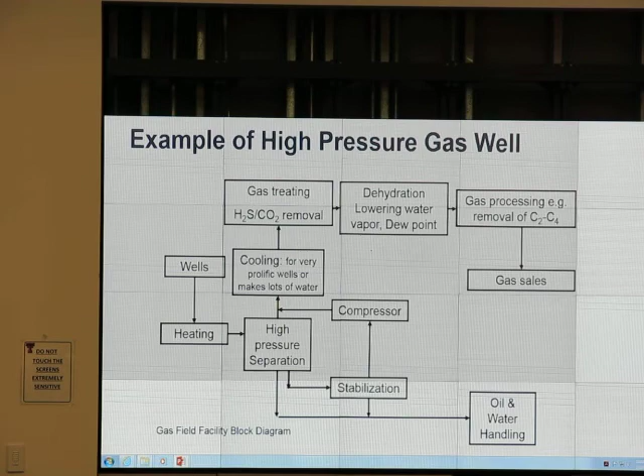So this lecture we will talk about the theory part. We have separator, wellhead, compressor.

Let's say we have a pressure of 200 psi, and the gas pipeline is at 1000 psi. If you want to sell to that gas pipeline, you have to increase the pressure somehow. To increase the pressure, we use a compressor. So we go up from 200 to 1000 psi. The overall compression ratio is 5, which comes from 1000 divided by 200. A compression ratio of 5 is too much for a single stage.

We'll talk about why that's too much. Here's a compressor: when incoming gas comes in, it goes to a separator or scrubber to remove any liquid, then into the compressor where we compress it, and we may have to cool it down and compress it again.

Theory of compression: we can have isothermal compression. Isothermal means constant temperature. That was on the quiz last year about the isothermal thing.

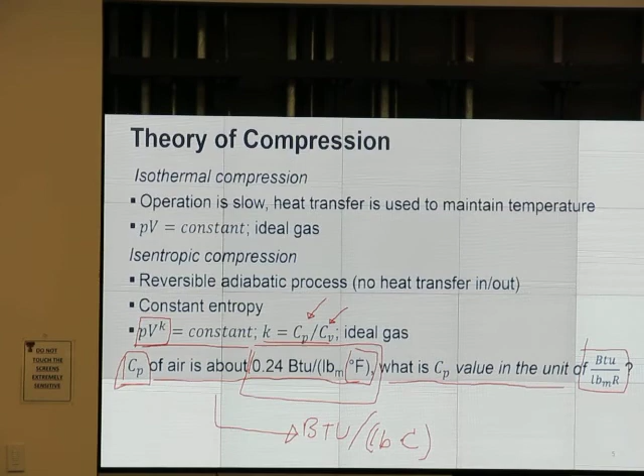All of you have to be able to answer this kind of thing in exam, okay? Basma, let me change the question. How much is typical value for Cp of water in the unit of BTU per pound per Fahrenheit? Not per mole, per mass. How much? 1, right? What does it mean? The heat required to increase the temperature of 1 pound of water up by 1 Fahrenheit

is 1 BTU. Okay? If we need to heat it up by what, 1.8 Fahrenheit, we need more heat, right? So 1 Celsius, is that 1.8 Fahrenheit? Is it 9 or 5 something? Yes.

Okay, delta T of 1 Celsius equal to 1.8 Fahrenheit, right? The increment in temperature. So if I change this unit, instead of per F, I change it to per C, the unit of C has a kind of bigger gap. We require more heat to raise the temperature up by 1 Celsius. You agree? Do you? You didn't say anything. Let's hear what you say in the exam.

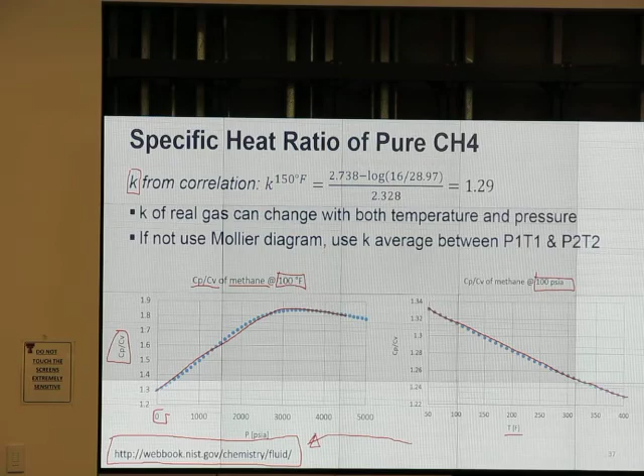Okay, and if you want to know exactly what it is, you either use a chart, handbook, or that NIST website, I'll just Google it. The NIST website is very reliable, so I use that, so that I give you some kind of typical value. Your part of the work is you have to know that it is more than 1. Okay? So if I ask you, Cp over Cv, is it more than 1 or less than 1? You should be able to tell it's more than 1.

Alright, we have several kinds of process when we do compression. We can have PV to the power of n equal to constant. N may be 0, n may be 1, n may be k, n may be infinity or something. So if n equal to 0, this means P equal to constant. Constant pressure process we call isobaric process. Okay, memorize this name, isobaric process means constant pressure.

So if n equal to 1, then we have PV equal to constant, like PV equal to ZnRT, right? So when T is constant, PV equal to constant. That is isothermal process. Isothermal process is constant temperature process.

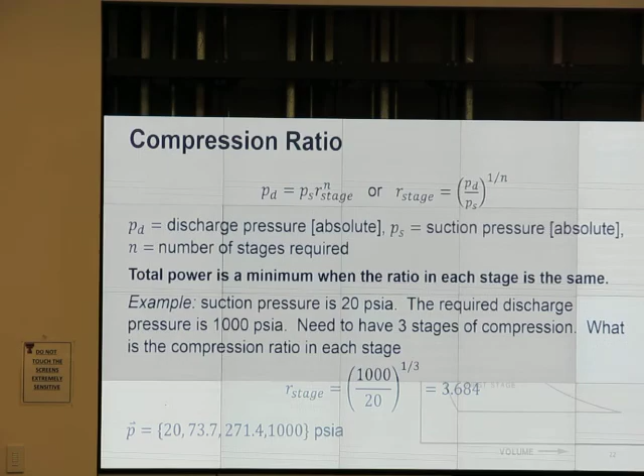If I have P, V to the power of kappa, okay, equal to constant, that is isentropic process, or constant entropy. Okay, if we go to infinity, this means the change in P doesn't matter much or something, so we call it constant volume process. We don't have constant volume process in reality, but just to give you a name, that's called isochoric process. Constant volume means we didn't compress it at all. Okay, we don't have constant volume process. I review all this to you because the reason for today is eventually we will do some derivation and try to get this equation.

That's the objective of today. With this equation, what we can tell is how big should be the compressor, if I know what kind of gas.

Intake pressure, discharge pressure, I should be able to tell how many horsepower do I need per million standard cubic foot. So I want to buy a compressor. I cannot just say I want to buy the compressor. Actually, if I tell CSI my discharge pressure, suction pressure, what kind of gas, and flow rate, they just give me, hey, you need to buy this big compressor, maybe 100 horsepower or something. We believe that it is correct, but they don't tell you anything else. They just give you, hey, you buy 100 horsepower. Just that.

So why do we have to learn all this? We want to check if it is right or not. What they tell you, is that right or not? Is it in the same order of magnitude or not? You don't just want somebody else to tell you what to buy, right? You really want to check, is that what I need? And if you be able to do the calculation too, you can tell them, hey, I think your calculation is okay.

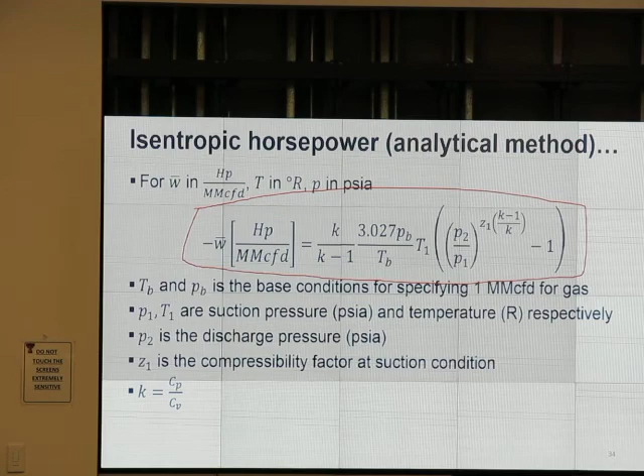Most of the time it is, like 95% of the time it is. But sometimes some company may oversize a lot for you. It can happen. It's not all the time. That's why I want you to know this.

Alright, so that's the end product. How do we design a compressor? Alright, that's the name of the process. Now, how does it work? If I have a recip unit, reciprocating compressor, reciprocating motion is back and forth motion.

When I have a reciprocating compressor, let me show you the PV diagram. Pressure and volume. We start at point 1. Valve closed, that valve closed, that valve closed, and we have cylinder full of gas. It is at low pressure, so we have low pressure but high volume. That is at point 1.

Then I start my compression process. I compress it, I push, use some force to push it. I move my piston from that position to another position. My valve still closed, okay? When my valve is closed, I push it. What happened? Volume goes down, but pressure goes up, right? Pressure goes up. I close the valve and I push.

When I reach point number 2, okay, I'm done with that. So I open the valve, I open the discharge valve. So I'm ready to send my gas that I compressed out to the next unit. Okay, so I open my discharge valve.

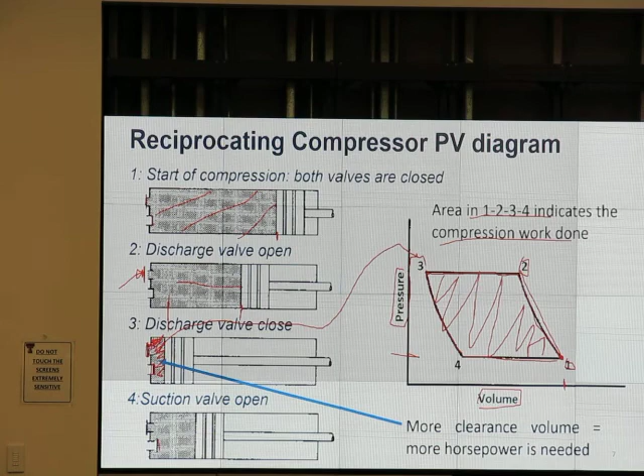All right, look at the clearance volume. Look at this in number 3. What if I have 99% clearance volume? I push just a little bit, and then I do this. I didn't do much compression, right? I do just small compression compared to compress a lot. Okay, but I cannot go all the way. If I go all the way, I hit the valve. Think about that, I cannot do it all the way. It has to have some clearance volume, right? If I go all the way, I hit. I don't want that. But if I do very small, it doesn't do anything.

So that clearance volume tells us about how efficient we are in terms of compression. If we have big clearance volume, it's not a very efficient process. We call that theoretical volumetric efficiency, E sub V. E sub V is the efficiency of the compressor cylinder. It's calculated by the ratio of volume of gas actually delivered divided by piston displacement. Here's the formula.

So I put here, re-expansion has the greatest effect on volumetric efficiency. If you have a big gap, it's not good. Another factor, even when I look at this equation, affects how efficient I am. If R is big, I have low volumetric efficiency. It's not good. So if CL is big or R is big, I don't have good efficiency in terms of volumetric efficiency. This means if I have a large compression ratio, it's kind of equivalent to pushing my piston just a little bit, instead of going all the way, instead of going almost all the way.

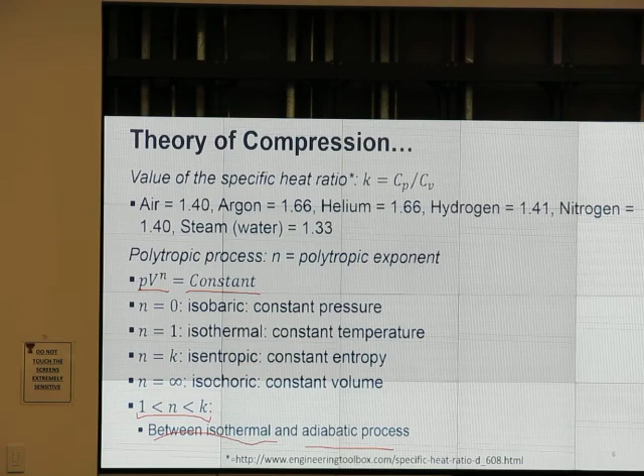And now we go back to our definition of polytropic process. Polytropic process, we have PV to the power of n equal to constant. N can be anything. If n is 1, it's isothermal. If n is k, it's isentropic. In reality, we have something between isothermal and adiabatic process. So we know ratio of volume equal to V1 over V2 is P2 over P1 to the power of 1 over n. So this part comes from this equation, that's what it is.

Then look at this, P1 and P4, is that the same? Yes, pressure at point 1 and pressure at point 4 is the same, it's on the same level. Pressure at point 2 and pressure at point 3, they are the same, right? So this means I can just write it like this. And from this same relationship, PV to the power of n equal to constant, is for expansion or compression, for this curved part of the chart, not for the straight line part. So then I have this relationship, right?

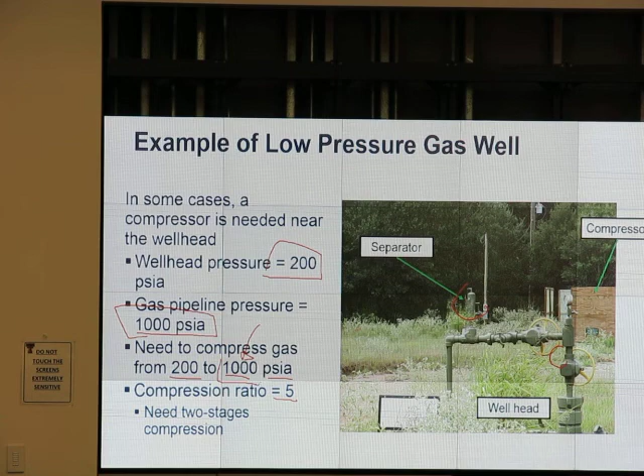And I call this R sub V, okay, R sub V, ratio of volume. Is it compression ratio? Not really. Compression ratio in PSIA is ratio of pressure, it's not ratio of volume. Ratio of pressure is a compression ratio, but ratio of volume is not compression ratio. Then I know that V1 equal to VC. VC is that small gap plus this V, right? So this will give me volume at point 1. So V1 is VC, and that is I call V delta.

So V delta, V4 is V3 multiplied by RV, volume ratio from this equation, okay? Or V4 equal to, what is V3? V3 is a volume at that point, which is the same as VC, clearance volume, right? So I have this equation. Substitute everything in that, I have this, rearrange it a little bit, I get that. And now look, R sub V is not compression ratio yet. It is compression ratio to the power of 1 over n. If n is k, then I get that, so that equal to R sub V.

And clearance ratio. Clearance ratio is VC over V delta. VC is that gap, V delta is this part, the total stroke volume. This is the part that you need to know. When I use this equation, I have clearance fraction. It's not very clear how I get that. What is clearance fraction? What fraction divided by fraction? But when you look at the derivation, you know for sure it is a gap divided by the total stroke volume. That's VC.

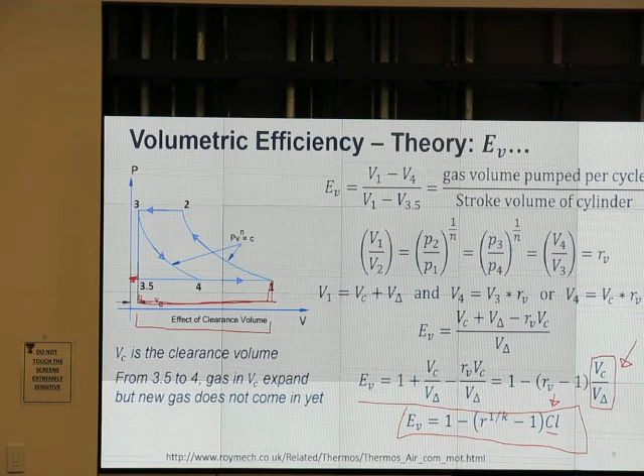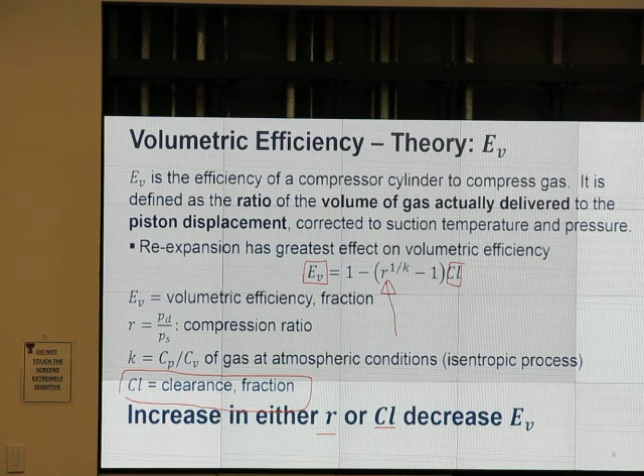So that's how we do the derivation for E sub V. At the end, you know the definition of CL, and two more things: it's not good to have too big R or too big CL, but we always need some clearance so that the piston doesn't hit the wall. All right, work required.

The objective is to tell how many horsepower do we need to buy. Maximum theoretical horsepower, at most, in theory, the horsepower for reciprocating unit can be calculated from the adiabatic compression process. Reversible adiabatic is this line.

And at least the minimum theoretical work for the compression is the isothermal process. So we can calculate this line and that line. So when we say minimum theoretical work, it's really minimum work. The actual work is more than the maximum theoretical limit. The actual line is either this line or that line, so the actual one will be more than the theoretical value.

Now I want to know why we need less power, or less horsepower, if we can do an isothermal process. Look at this: if I have isothermal process, I have less area under the curve, right? If it is adiabatic, meaning I don't let heat escape, I have more area under the curve. What is that conceptually? What do you think?

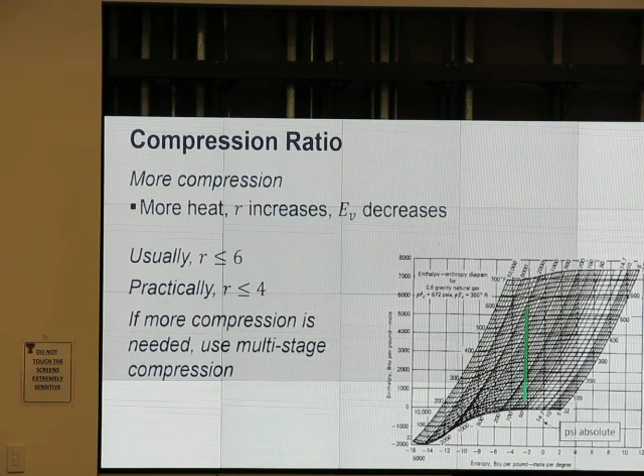Any other explanation? How do I explain to anyone who doesn't want to know anything about the theory at all? How do I do that? Of course with theory, I have the derivation and I can show you that eventually cooling it has less area or something. So if I have to explain to someone who doesn't care about the theory, how do I convince them? I would do this.

When we compress it, temperature will go up and up and up and up. When it's too hot, it's not efficient. So if I can have an isothermal process, this means I can compress when it is not too hot. So when it is not too hot, I can compress it, then it requires less horsepower, just that. That's for layman language.

And I just say, okay, when I look at this compressor, I see at the back of the compressor there is a big air cooler, using air to cool it for interstage cooling. So this means cool is good, just that. But you need to know more than that, right? Not just that.

Alright, adiabatic process: we assume that the amount of heat transfer to gas or compressor cylinder and piston is very small compared to the work involved in the compression. So in theory, adiabatic means no heat in or out. But in this case, we may say the heat coming in or going out is very small compared to the heat involved in the compression process. So we may assume it's adiabatic. It goes a little closer to the actual line, but it's not the same, it's still less.

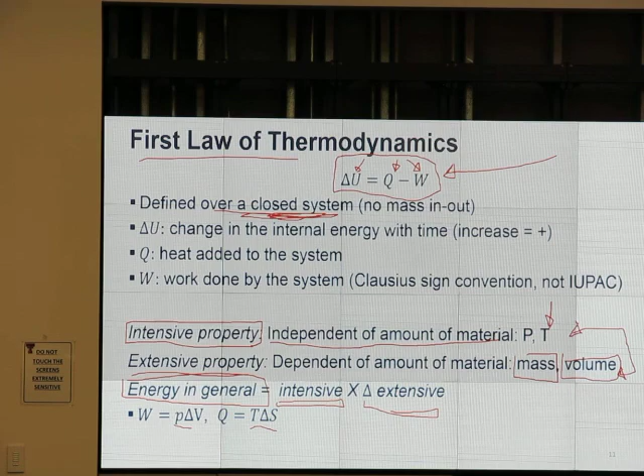Okay, steady state, in SI unit. I have delta U, I have Q, and minus W - same as the first law of thermodynamics. First law of thermodynamics here is defined over the closed system, defined over the closed system. But this one is kind of first law of thermodynamics too, but it's not defined over a closed system.

The difference between this slide and the previous slide is there's mass in and out. It's steady state - mass going in, mass going out, they're the same, but there's mass coming in and going out. So in addition to the increase in temperature or internal energy, it can have a change in kinetic energy, potential energy, or it may do some delta PV work. So this equation is for the steady state case. It's defined over a control volume domain. Mass can go in and out. Delta is defined as out minus in. So that is SI unit.

For SI unit - Jeremy N, Bilisek is gone, Emily M, Billingsley - that's Emily, hi Emily. What is the unit of Q for SI? You don't like SI. How about W? Work.

Okay, in SI, what is the unit for mass? Emily? Kilogram, okay. How about G? Meter per second squared. Okay, multiply them together, become Newton. Newton multiplied with length gives us J, what? Joules. Okay, so on the top one is joules - the unit of every term is joule. Emily, what about the bottom one? What is Q over there? What do you think?

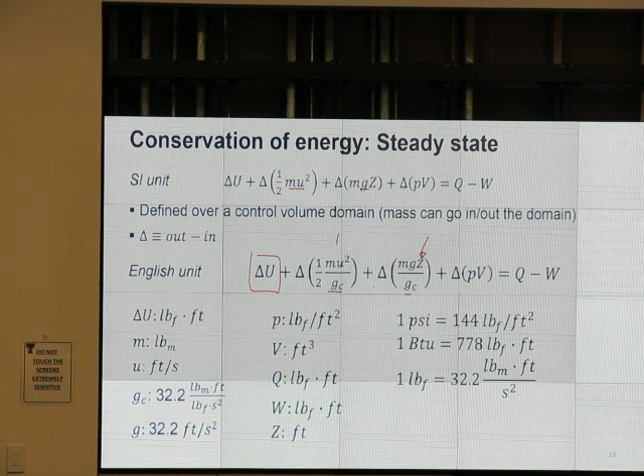For the horsepower thing, we cannot get the actual horsepower, but we can have theoretical prediction of the horsepower, close to the actual horsepower. Is it isothermal case or isentropic? Raise your hand. Isothermal case.

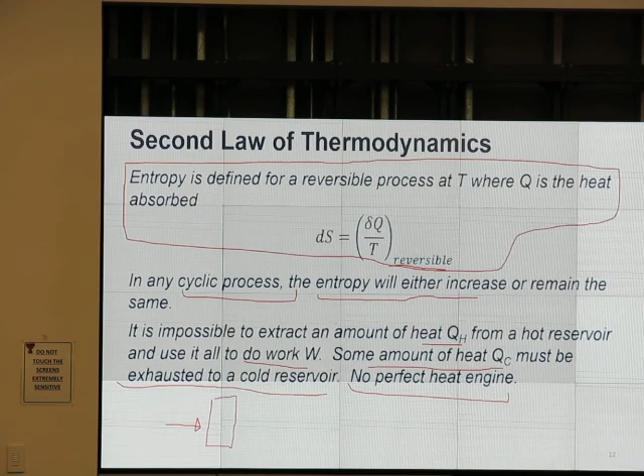Raise your hand. It's wrong, don't raise your hand. Isentropic case, this one is correct. So look at the diagram previously that we have. Isentropic case is somewhat closer to the real case, right? That's why we do ideal isentropic horsepower estimation.

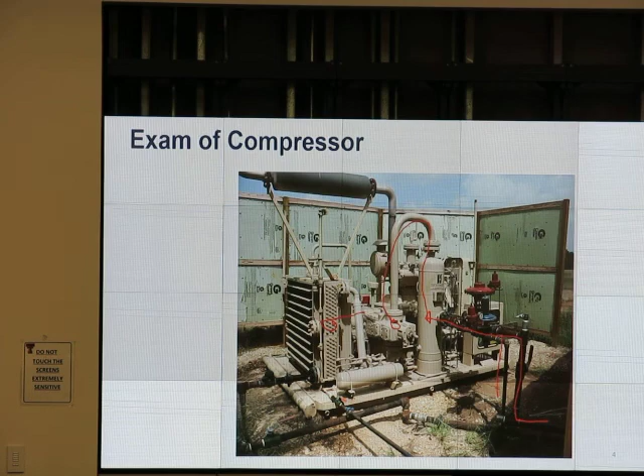We start from steady state energy balance. We neglect the change in elevation. Is this okay, neglecting the elevation term? If you look at the compressor in the field, it's coming in maybe that tall and going out maybe similar, probably it doesn't have much change in elevation, that's what I can say. It doesn't have much change in velocity either, so I neglect the change in kinetic energy.

And I say it's reversible adiabatic. Reversible adiabatic means Q equals 0, so I can delete that term. And instead of U, I combine U with delta PV, then I have enthalpy. When I neglect all this, then I get enthalpy equal to minus W.

W is work done by the system. Minus W is work done on the system, as per this definition. So this means if we add heat on the system, if we have work on the system, enthalpy goes up, it's getting hotter. If we do some work on the system, it's getting hotter, or if we compress gas, the gas becomes hotter. That's what this equation tells us, right?

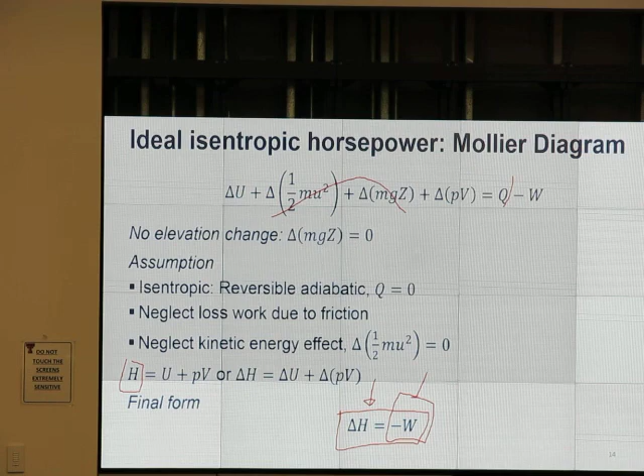Isentropic horsepower we can use from the Mollier diagram, entropy S and enthalpy H. When I want to know isentropic horsepower, when I compress from one pressure to another pressure, I go up straight, just like that. Good. If you still recall temperature, the line of constant temperature is this kind of line, from left to right or right to left, the horizontal one, that one is constant temperature. The kind of vertical thing, or close to vertical, that curve is constant pressure, that's a constant pressure line.

So when I move from 1 to 2, then I read delta H. Then I can tell, ideally, if I do the compression, how much heat will it generate, or how much hotter will it become, I can read the temperature directly. But we will tell you how to use the chart in a moment.

So from this equation, delta H equals minus W. From the chart, we don't have capital H, but we have this thing, small h. Small h is molar specific enthalpy. One of them is at the intake or at the suction, and H2 is at the discharge, suction and discharge, that's what it is. So work is related by delta H like this.

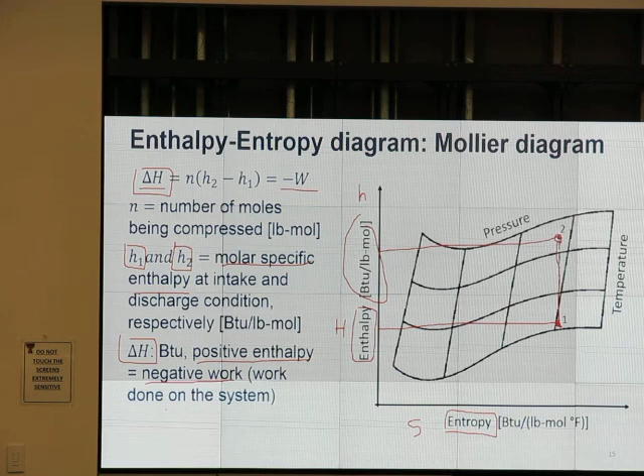Okay, Mollier diagram. Now you are ready to use a Mollier diagram. What is the theoretical horsepower consumed by compressing 1 million cubic feet per day, measured at 14.73 psia and 60 Fahrenheit?

From 65 psia and 80 F to 215 psia. Okay, when we say PSIA or standard volume, what is the standard pressure for Texas? Anyone know? It is not 14.73, it is 14.65. For Texas in particular, it's 14.65. But the AGA handbook, American Gas Association, they use 14.73. So if you report your production to the state, you use 14.65. If you report to federal, you may have to use a different number.

But this time they show, okay, it is that much and that much for standard pressure and temperature. I want to compress from 65 psi to 215 psi. First of all, how much is the compression ratio? Who has a calculator? Tell me, how much is 215 divided by 65? 3 something, 3.3. That is the compression ratio. So discharge divided by intake.

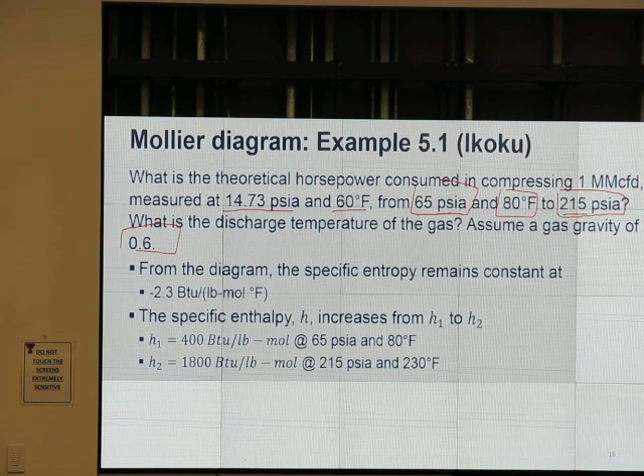So when we go straight up, it is constant entropy, constant S. So we have a constant entropy process. We are doing theoretical horsepower calculation, right, or theoretical compression. So theoretically, when we do the compression, we assume constant entropy, right? Good. So we assume that we go straight up in theory.